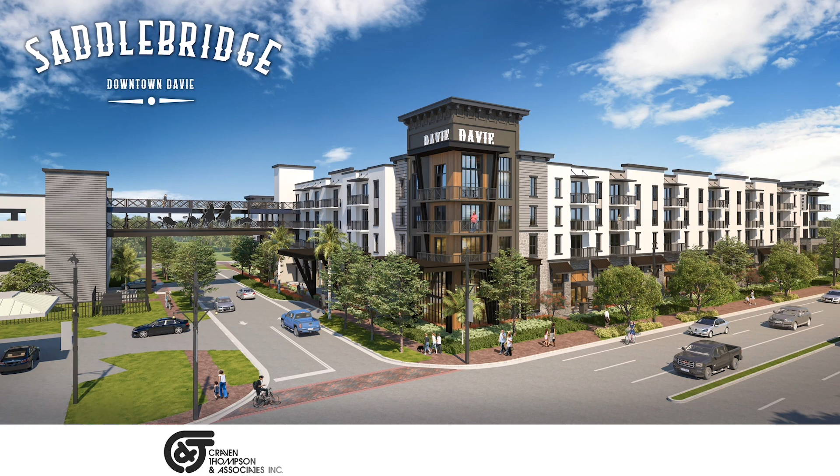On behalf of White Oak Development, we are proud to present this public participation presentation for Saddlebridge Downtown Davie, a multifamily development located in the heart of Davie, Florida. As part of the site plan procedures of the town of Davie, we are providing this presentation to give residents and business owners a preview of what we have proposed for our site. We sincerely hope that you're as excited as we are about bringing this project to life.

The Saddlebridge Downtown Davie site is located in eastern Davie on Davie Road just north of Griffin Road. This project is adjacent to the Bergeron Rodeo grounds and is comprised of 8 parcels owned by the town of Davie and the Community Redevelopment Agency.

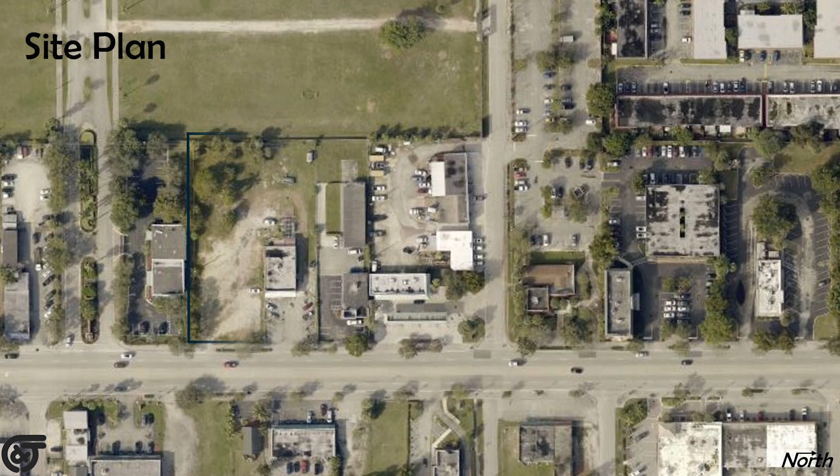The site plan features 2 buildings along the western portion of Davie Road, flanking either side of Southwest 42nd Street. The buildings are connected by a bridge that spans Southwest 42nd Street and creates an entryway for the rodeo grounds to the west. A new road, Southwest 65th Terrace, will be constructed to provide a connection to and from Southwest 43rd Street to the south.

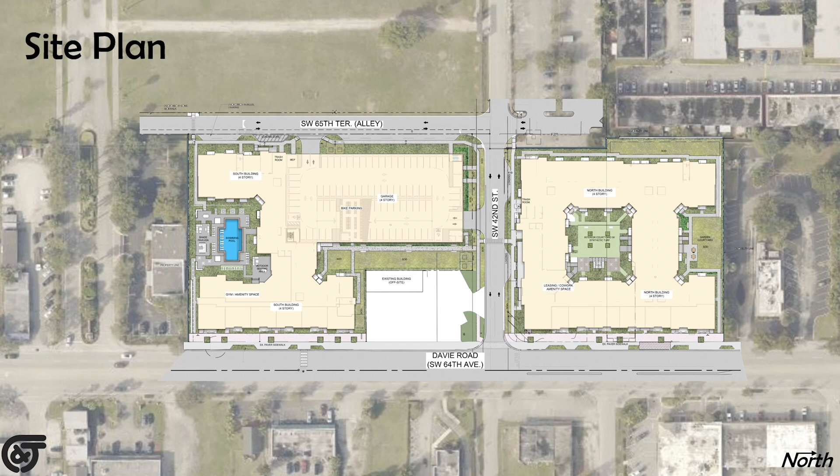The zoning district and future land use categories are both regional activity centers. The zoning designation also includes transit-oriented street, which acknowledges the importance of multimodal connectivity and walkability along Davie Road. The overall site is just over 4 acres and will provide 286 dwelling units. 20% of the units, 57 in total, will count as inclusionary housing. These will be made available to low-income and moderate-income households.

The project site is located within the West Side Improvement Area that is comprised of approximately 67 acres west of Davie Road. Stormwater improvements were constructed by the town of Davie to facilitate redevelopment for the area. The project will comply with the conditions of the existing master permit.

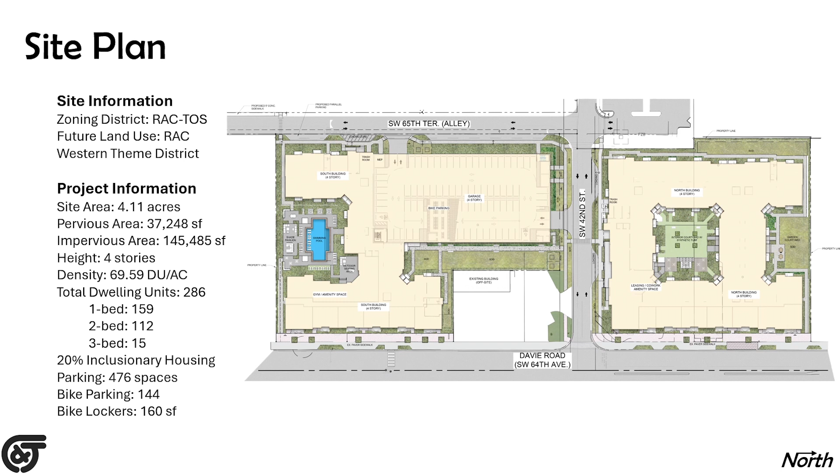The landscape design for Saddlebridge Downtown Davie consists of several large courtyards that are to be utilized as private amenity spaces for its residents, including a pool courtyard for the south building, open garden courtyard to the north, and a centrally enclosed interior courtyard for the north building. The pedestrian experience along Davie Road has been enhanced by providing wider paver sidewalks, benches, oversized live oaks at 20 to 22 feet in height for shade, and a foundation planting strip with tiered landscape to soften the building facade.

Large green buttonwood street trees have been provided for shade and to enhance the pedestrian experience along 42nd Street, serving as a connection to the parking lot for the existing rodeo grounds. Extensive foundation landscaping provides an aesthetic appeal to the building facade and serves to buffer the parking garage. The lush landscaping and street trees continue down the new street, Southwest 65th Terrace, connecting this project to the existing main entry drive to the rodeo grounds.

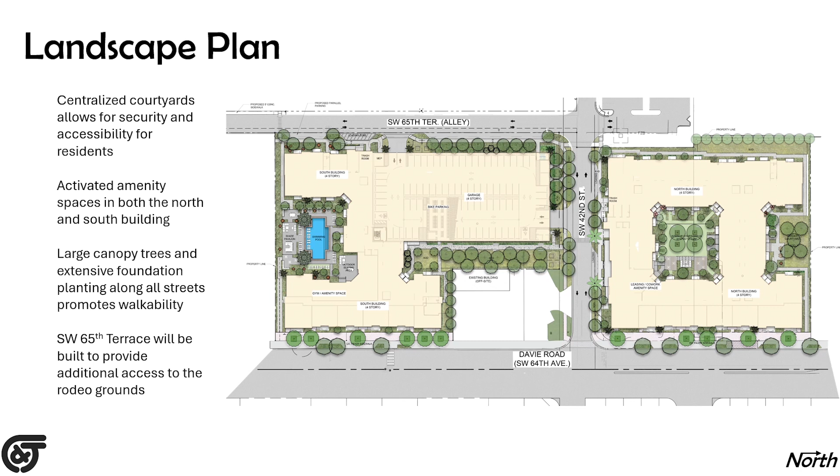The south building features 101 units, a 4-story parking garage, bike parking, an amenity deck surrounding a swimming pool, and a gym. The north building provides an additional 185 units and includes space for the leasing office and the co-working space. Residents will be able to access the parking garage in the south building via a sky bridge over Southwest 42nd Street that connects the 2 buildings.

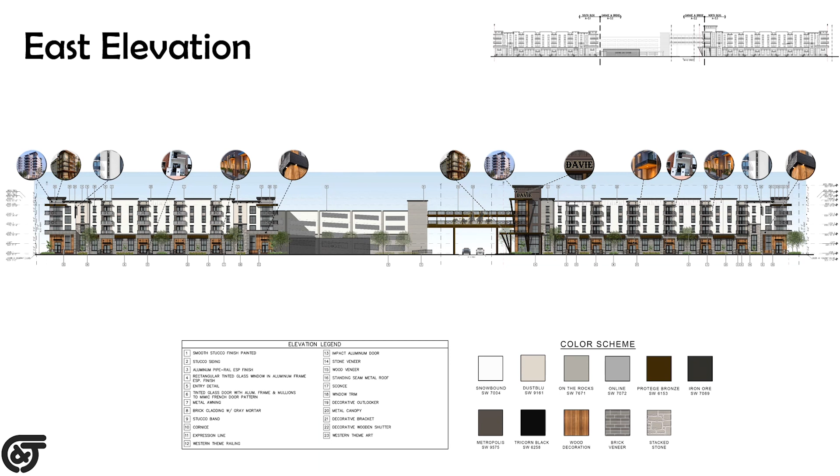The design of this development adheres to the town of Davie's Western Theme Design Manual. It also gives a welcoming street presence along Davie Road for both cars and pedestrians. The building was designed with the aim of capturing a fresh, distinctive Western charm, achieved through a blend of historical authenticity, decorative elements, and features that enhance the overall appearance of the building.

This includes premium materials like brick, stone, and wood, and paint colors consistent with the Western theme. Note the Western theme railing featuring a central X motif included in both the bridge and the balconies. Enhancements such as cornices, window lintels, stucco bands, as well as detailed molding and trim work throughout the building, have been meticulously integrated.

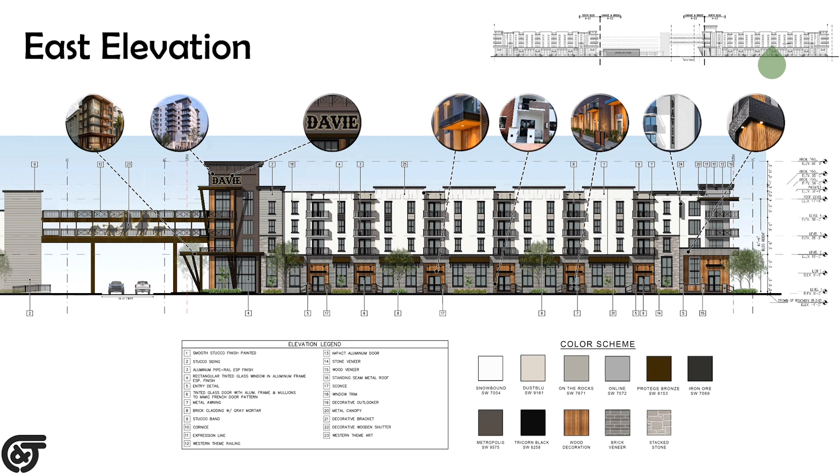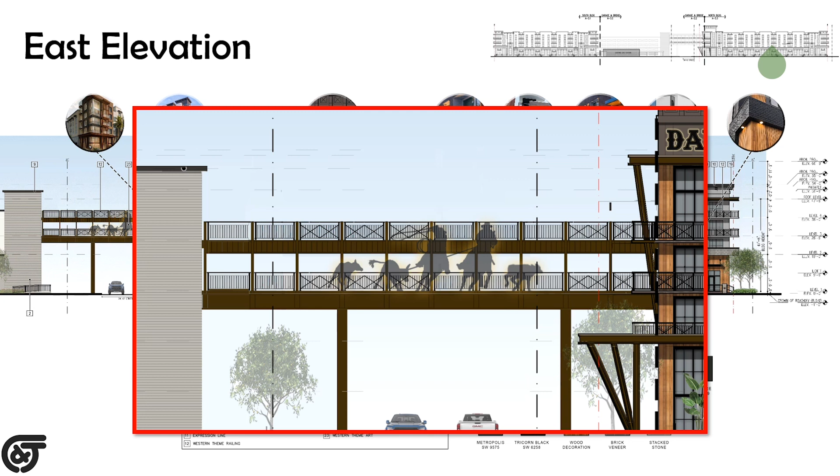This project holds significance as the primary entrance to the rodeo, highlighted by an illuminated bridge spanning the road, accentuating the western essence of the town. An exceptional artwork piece will serve as the focal point of the bridge, enhancing its visual appeal. The architectural detail continues to the north side of the north building, with balconies overlooking the garden courtyard.

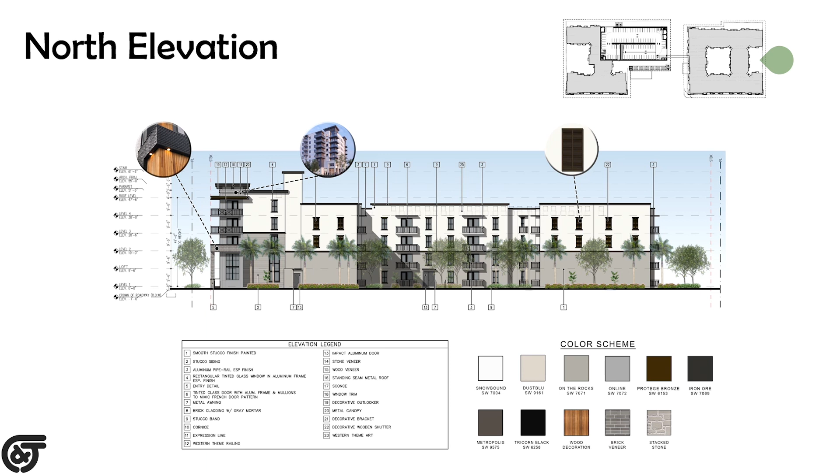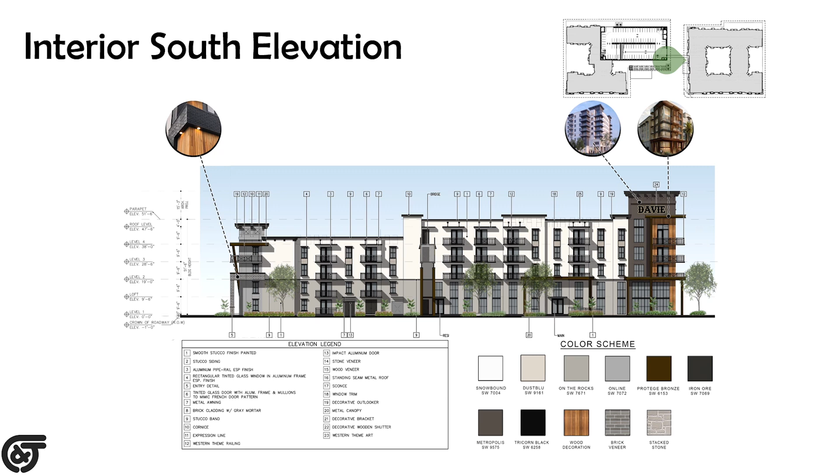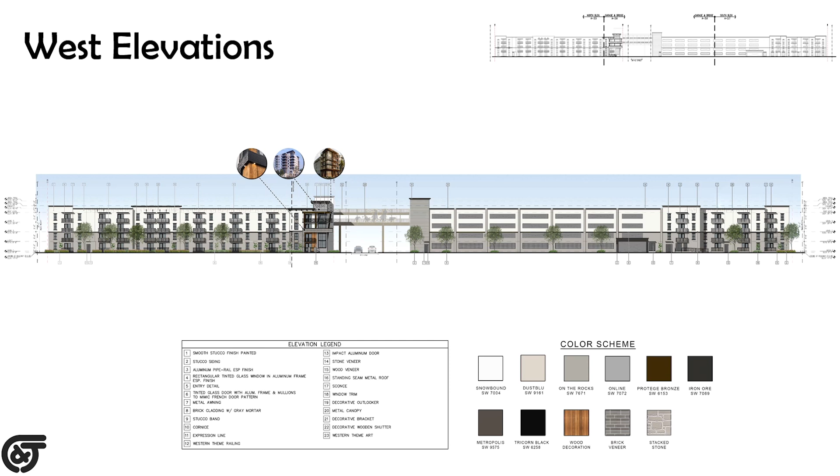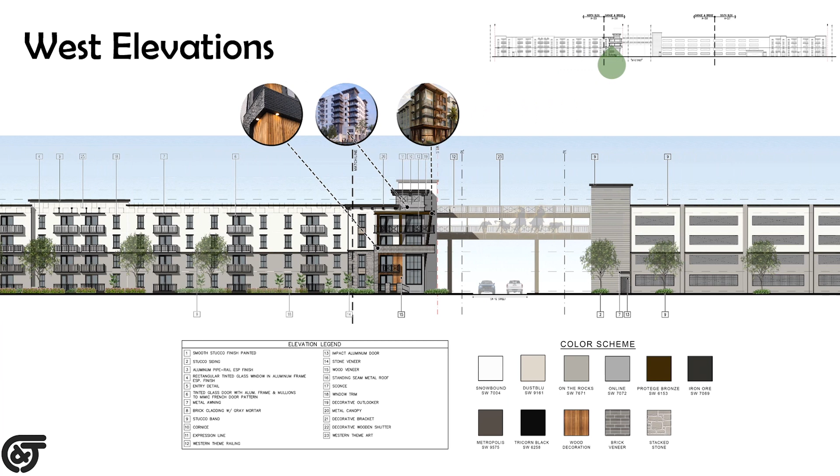The interior south elevation shows the view of the north building from Southwest 42nd Street. Note the location of the connecting point of the bridge in the center of the building. The western facade of the building faces the Bergeron Rodeo grounds and lines the newly built Southwest 65th Terrace. Several elements found on the eastern facade are also found on the western portions of the building. This creates a consistent product from the residential units to the parking garage.

Great effort has been taken to provide a development that not only appeals to those on Davie Road, but from adjacent properties as well. The south facade of the south building has been broken up to avoid long uninterrupted massing and to provide the perfect sunny location for a ground-level pool deck.

According to the town's land development code, requests for variation from the standards and requirements can occasionally be expected in order to account for the variation in conditions within the RAC districts and the difficulty of accounting for them in a design-specific regulation. Section 12-438.23 provides a design-based variation process that shifts the focus of review from hardship to design and logistics issues. As part of the site plan application, we are requesting 4 design variations in order to provide a site that meets the intent of the code but considers the challenges of the site.

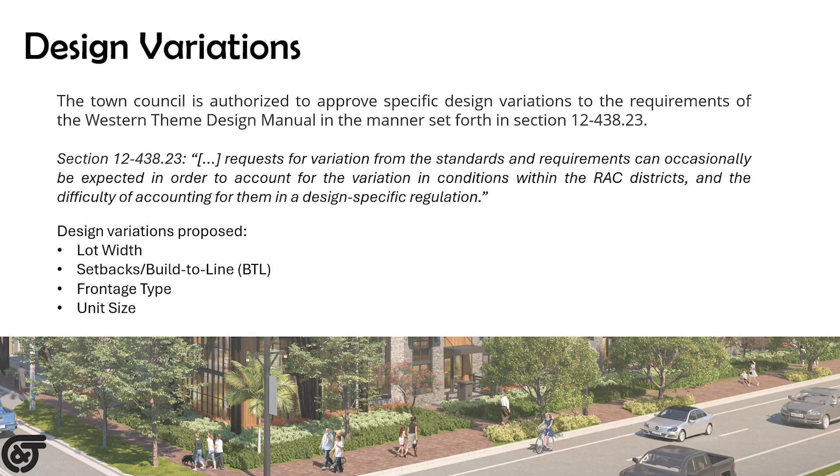Town code requires buildings within this zoning district to occupy 100% of the lot width. This makes the area in front of the building walkable, and it engages the street front. This property has 5 street frontages, making compliance with the code challenging. In order to provide adequate drainage, landscaped area, and circulation and access, we are proposing the following reductions. For the north building, we are providing buildings that occupy 94.1% of the lot width along Davie Road and 91.9% along 42nd Street. For the south building, we are providing buildings that occupy 88.4% of the lot width along Davie Road and 85.3% along 42nd Street.

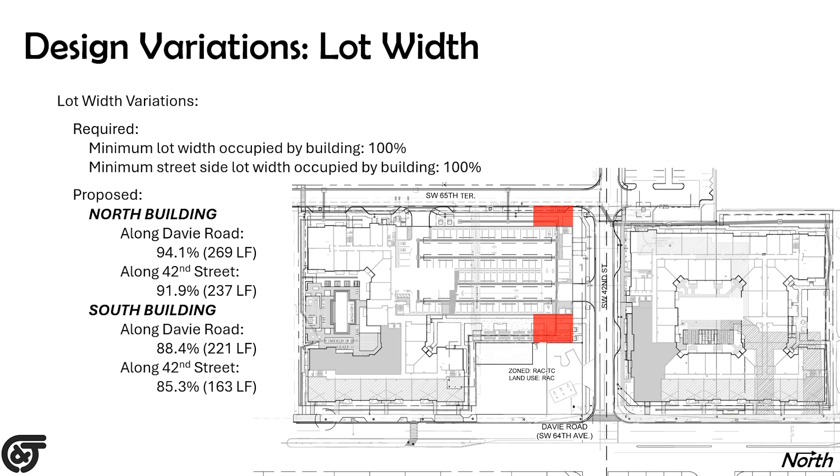The minimum setback, or build-to line, along Southwest 42nd Street is 0 feet. This serves as a baseline for the required development area. In other code sections, a certain amount of the building must be built at this line. We will cover that in the next slide. Due to the design of the building on both sides of the road, and a desire to create a buffer between the parking garage and the north building, we are providing a minimum setback of 12 feet for the northern building and 13.1 feet minimum setback for the south building.

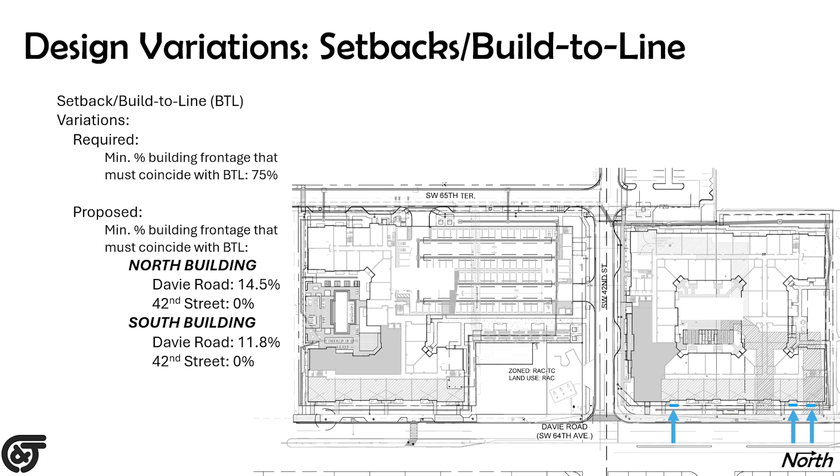Another code requirement is that a minimum of 75% of the building frontage must coincide with the build-to line. We are proposing a reduction to 14.5% for the north building along Davie Road, 0% for the north building along Southwest 42nd Street, 11.8% for the south building along Davie Road, and 0% for the south building along Southwest 42nd Street.

Building frontage types allowed in the transit-oriented streets RAC district include arcade, gallery, shopfront, and modified shopfront. These types are mostly geared towards commercial or mixed-use buildings with commercial along the first floor. This development is residential, and as such, a stoop or porch frontage, both prohibited types, would be much more suited for these buildings. As you can see in the town's definition, a stoop provides a sense of security and separation from the sidewalk. This is shown in the rendering with raised landings and railings.

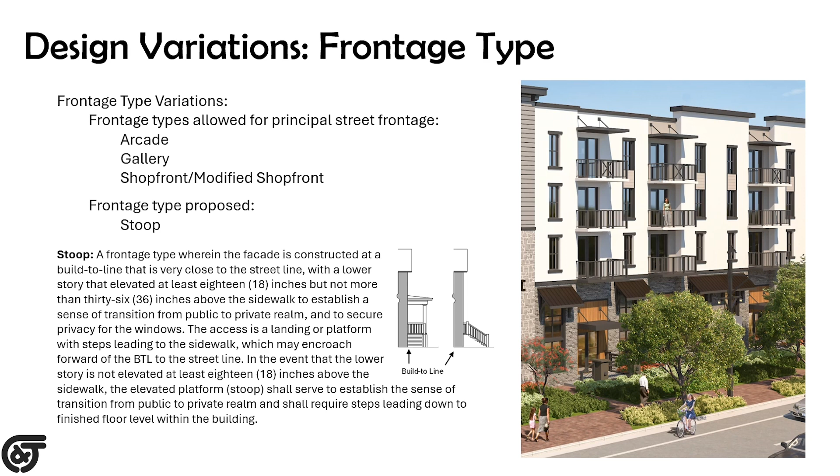The Saddlebridge Downtown Davie development will provide lofts and 1, 2, and 3 bedroom units. Each unit size has several layouts. The 1-bedroom units are shown here. The 3 models in blue are smaller than is allowed by code, but still provide a comfortable living space. We're requesting a reduction in the minimum size for 1-bedroom apartments from 750 square feet to 513 square feet.

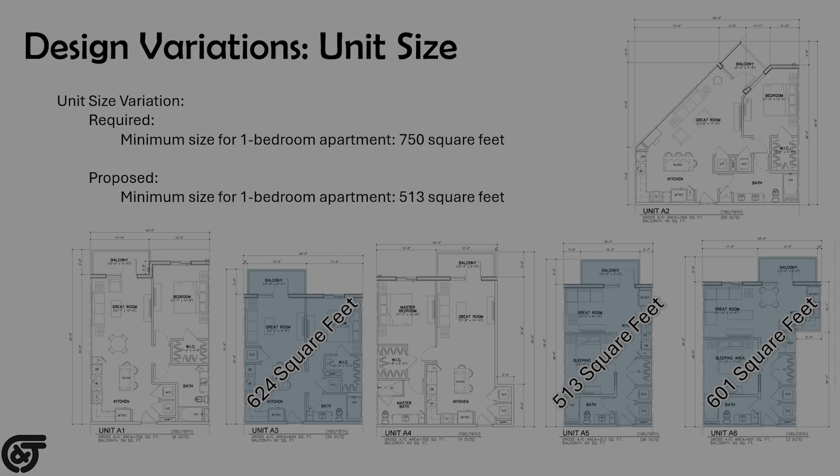When designing these residences, our team strives to provide a quality product with an iconic design. The buildings engage the streets and provide abundant landscaping to create a pleasant pedestrian experience. Our mix of housing types serves a wide variety of residents who will call the town of Davie home, and our modern take on the Western theme brings a beautiful entranceway to an important local landmark. We believe our development fits in perfectly in the Davie community.